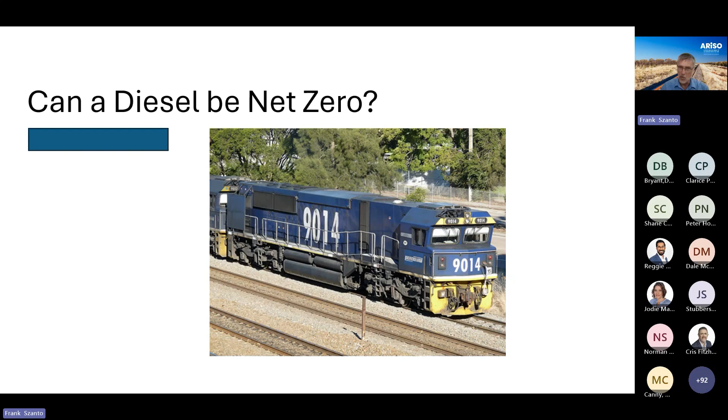Okay, thank you, and thank you to everyone for joining the webinar today. I must say, I did most of the preparation for this for AusRAIL last year, and that was before the world caught fire. At the moment, I wonder, does anybody care about emissions, or would they just like to get their hands on some diesel if they possibly can? But I think the talk is still relevant because we're looking at what are the alternatives to diesel fuel for diesel. So we'll go ahead, we'll keep going with the seminar.

Okay, so rail emits 4 million tonnes of CO2 a year, 1% of Australia's total, and transport as a whole in Australia is 22.6%. So you'd think with such a small proportion, rail will get a free pass. Well, unfortunately it doesn't. Under the safeguard mechanism, a lot of larger rail operators are classified as big polluters and are caught up in the safeguard mechanism, which requires that you reduce your emissions by 4.9% per year until 2030, or otherwise you have to buy carbon credits. And at the moment there is no easy way to achieve this.

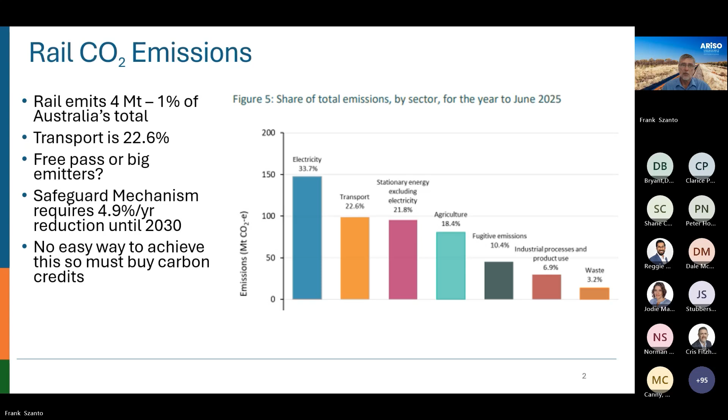Okay, so our major cities have electrified suburban networks, and hopefully electricity is being slowly converted to renewables. But outside the big cities, rail is powered by diesel. And just in case you forgot, diesel is all imported - we don't make it in Australia.

So there's an existing fleet of about 2,200 diesel locomotives out there, and also 250 DMUs - that's diesel multiple units, individual carriages. So that's nearly 2,500 vehicles altogether. So what time period would it take to replace them, when you think that if we've got to have them off by 2050, and like most diesel locos just go forever - there's a lot of diesel locos out there which were built when I was in primary school.

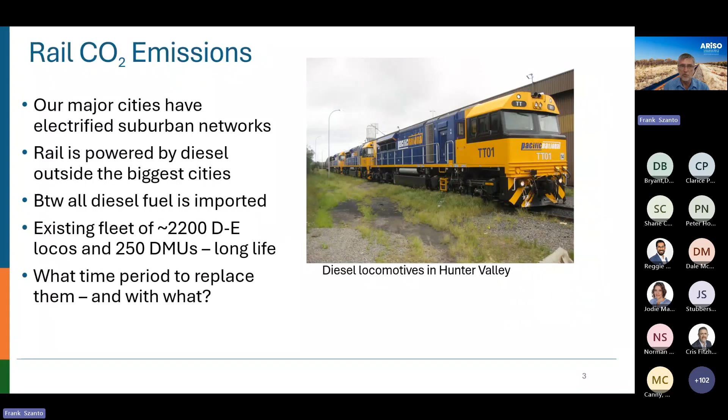One thing you could do would be to electrify all of our rail networks. We've got about 41,000 kilometres of track, of which at the moment about 3,400 kilometres is electrified. Just taking $5 million a kilometre, that would be $200 billion to electrify it all, which is a lot of money. So general talk is of using batteries and hydrogen as cheaper ways to electrify.

As of today, the range of battery trains is typically less than 200 kilometres, so it's not a universal solution.

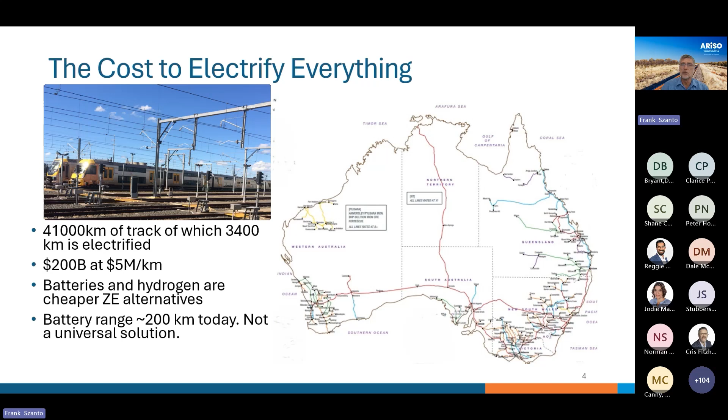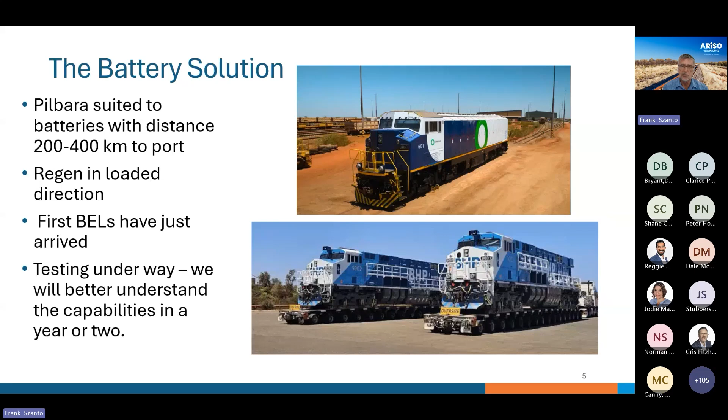Batteries are finally starting to be installed in locos in the Pilbara. Both BHP and Fortescue have taken deliveries of a few prototype BEL battery electric locos just in the last 6 months, and they're going to be commissioning them for quite a while. The advantages in the Pilbara are that the distances are about right, 200 to 400 kilometres to port, and the loaded direction is mainly downhill. The mines are up in the hills, so you're going downhill to port and you're in regen braking most of the way, which is advantageous for batteries. So they've got testing underway, but it's still going to be a long time before we see much movement in the composition of their fleets as they start to move to batteries.

Outside the Pilbara, there's really not much happening in Australia at all. Horizon's converting one narrow gauge loco. That picture on the right is a battery pack used on the 3000 class rail cars in Adelaide, which have been turned into hybrids, mainly so they can just not use engines when they're idling in the station.

But it would be expensive to convert all our fleet at the moment to batteries. If it was $5 million a pop, this is a figure from the air, 2,500 units, you're looking at $12.5 billion. And you'd have to convert 100 a year until 2050 to replace the whole fleet, that's a lot. And at the moment, batteries still can't go the longer distances.

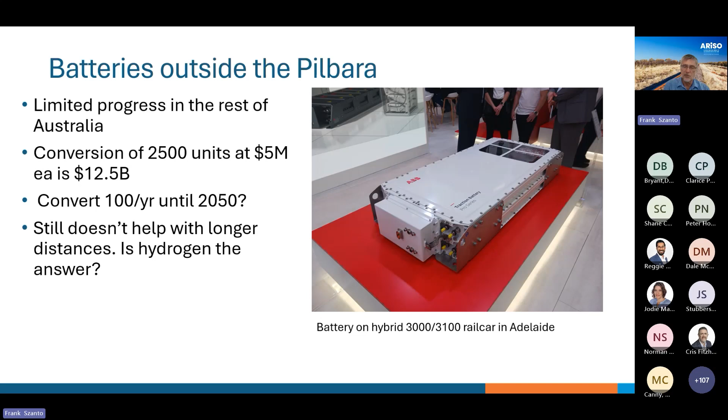So the question is, is hydrogen the answer? What I've got in the picture there is the refueling station for a fleet of hydrogen trains running in Germany. This fleet was introduced in 2019. There are 2 car sets with fuel cells replacing these multiple units. But you can see that the infrastructure just to fill the trains is pretty significant. You've got all those high pressure reservoirs there, which store hydrogen at 50 megapascals. The hydrogen comes by truck on the road from a chemical plant 35 kilometres away.

Transporting and storing hydrogen is very expensive. And at the moment, the hydrogen is actually made from natural gas or methane. When you make it from renewables, it's even more expensive. And the cycle efficiency - you're making the hydrogen by electrolysis of water, then you're transporting it, storing it, then it goes into fuel cells - you've got a loss of efficiency there. You end up, it's about 25% efficiency over the cycle, so much less than for batteries.

And there's really been no progress since 2019. There was a certain amount of optimism back then, but really nothing has happened with hydrogen since.

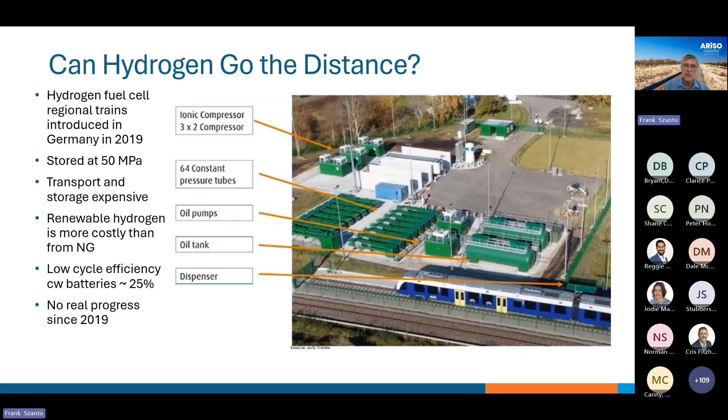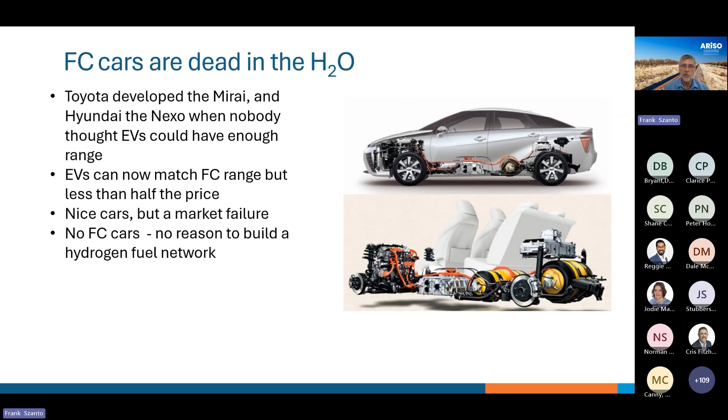And in fact, the idea of hydrogen-powered fuel cell cars, they're dead in the water. Toyota developed the Mirai and Hyundai the Nexo, and that development started more than a decade ago because at the time, nobody thought that battery electric cars could ever have the range that's needed to replace conventional petrol engine cars. But now, these are nice cars, but battery cars will do it for half the price or even less. And because there's been no development of hydrogen cars, nobody's built a network to refuel them. So there is no hydrogen fuel network. There's no hydrogen economy.

Some manufacturers are still persisting with fuel cell trucks because they think hydrogen is the answer for long distance trucks. If they succeeded, you'd have to build a network for refueling the trucks, covering all over the state or the states. But until that happens, there's no incentive to build a distribution network. And without that demand, no one's going to develop this hydrogen economy. I really think it's going nowhere.

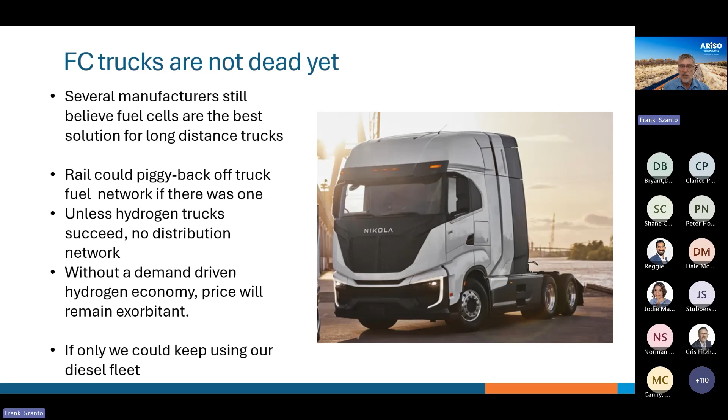So you ask the question, well, if only we could keep using our diesel fleet somehow. And what we really want is a drop-in zero-emission replacement fuel that wouldn't require modifying locomotives at all.

And the first thought, well, vegetable oils - you can burn vegetable oil in a diesel engine. And in fact, Rudolf Diesel, his early experiments, he was using peanut oil. One of his first diesels was exhibited in Paris in 1900, running on peanut oil. And vegetable oils are they are triglycerides.

When you burn vegetable oils in a diesel engine, it cokes up in no time, and that's not a good thing. So the answer to that is to make biodiesel, also known as fatty acid methyl esters, which you can make on a kitchen stove. It's quite simple.

You heat up vegetable oil with some methanol, moderate heat, and that produces a FAME, or fatty acid methyl ester molecule. The triglycerides are just three of them side by side, joined at the head with the three carbons joined together. When you boil it with methanol, the methanol replaces the three at the head, it goes away and produces glycerin.

That's a byproduct. And you get this molecule, which is exactly the same as diesel, as molecules in diesel, with 16 to 18 carbon atoms. But the difference is you'll see there's two oxygens on the right-hand side.

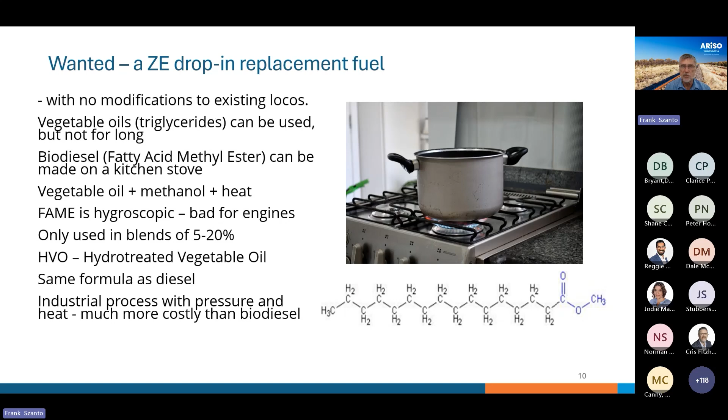So we have to find a feedstock. Now, in the EU, they've had some scandals with palm oil, where they like to have everything green in the EU, and they don't like rainforests being chopped down in Indonesia so you can grow palm trees and make palm oil. But the scandals were that palm oil was being imported to the EU labelled as mill waste, like the impure stuff from when you start up and stop your process. But it turned out they were sending large quantities of virgin palm oil, which was not what was supposed to happen.

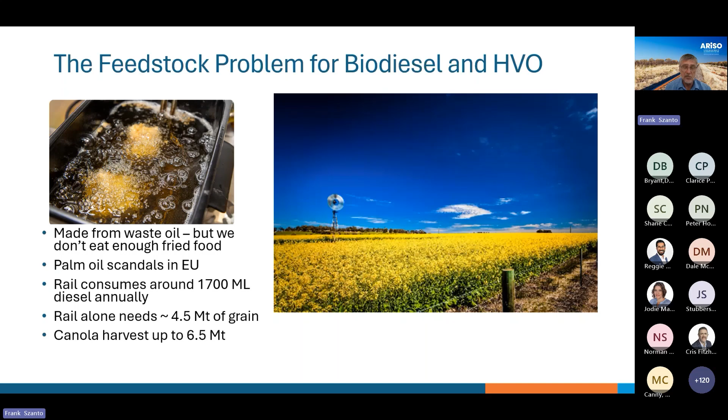So yeah, rail requires a lot of vegetable oil if we were going to go this way. Our annual consumption is about 1,700 million litres of diesel. So if you're going to replace that with oil, say from grain, you'd need 4.5 million tonnes of grain. And our whole canola harvest is about 6.5 million tonnes. And actually, apparently, most of that goes to Europe to make HVO.

So if it was just rail, you might get away with it, but road and aviation are going to be competing for the same oil, and between them, they're more than 20 times bigger than rail. And displacing food production to make fuel, it's just a dead end - it's just not going to happen. We'd have to double all our grain production just to make fuel.

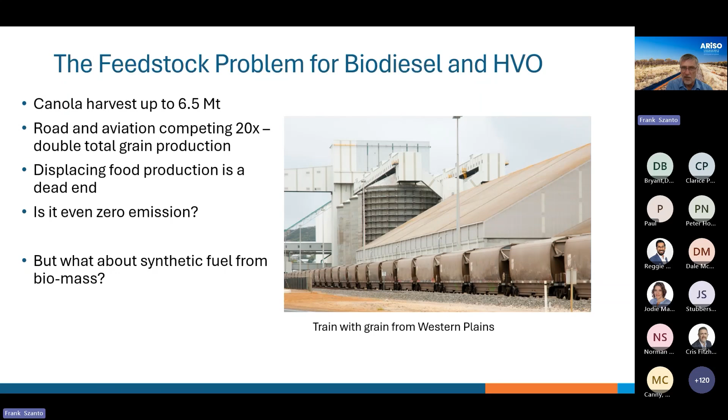So the other question is, is it even zero emission? Like to grow grain, you need fertilizer, and as we've just discovered recently, the ammonium-based products all come from the Middle East - they're made from natural gas. And also you need diesel for your farming machinery. So there's actually quite a bit of fossil fuel that goes into growing grain. So if those are ruled out, what about synthetic fuel made from biomass? By the way, that picture on the right is a grain train unloading at a grain hopper.

You can actually synthesize any hydrocarbon using the Fischer-Tropsch process, which was invented by German chemists back in the 1920s. It fueled the German war machine in the Second World War with synthetic fuels made from coal, and it was also used in South Africa during the apartheid era when they were being boycotted and couldn't get oil. It does contain exactly the same molecules as diesel fuel - what comes out is a range of hydrocarbons, but you get exactly the same molecules as diesel, so it's good in that way.

In the US at the moment, there are trials - it's called gas to liquid - where they're making diesel from natural gas rather than coal, which is obviously still fossil fuel. You could use biomass, or there's even talk of extracting CO2 from the atmosphere to make it, but that's a lot more expensive process.

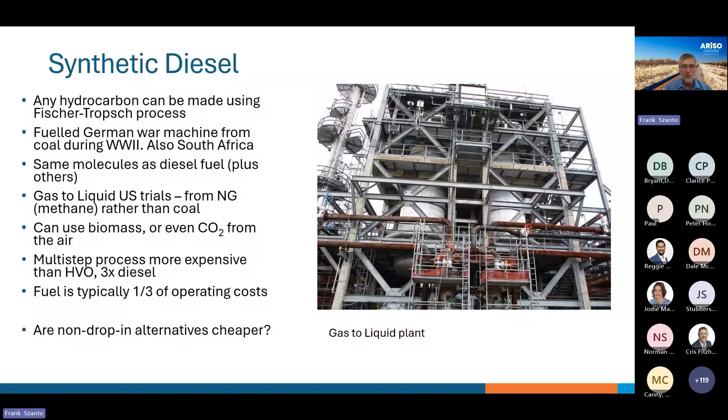Using natural gas is the cheapest way of doing it, but it still costs about 3 times the price of fossil diesel as it is now. For a lot of freight operators, fuel is about a third of their operating costs, so if you were to use a fuel which is 3 times the price, your business is pretty much in danger. So if the drop-in fuels are too expensive and not really viable, what about the non-drop-in alternatives?

This table here is not an exhaustive list, but shows most of the alternative fuels which are proposed. The things coloured red means that's not good. You can see on the left-hand column, most of them will not ignite in a diesel engine - they won't work in a compression ignition engine, except for DME at the bottom, which I'll talk about later. That means you can use a certain percentage, but you need a pilot fuel to ignite the mixture at the beginning of the combustion stroke. The other thing is most of them are gases - there's a few liquid, and except for natural gas, they all have a lower specific energy than diesel fuel, some quite a bit less.

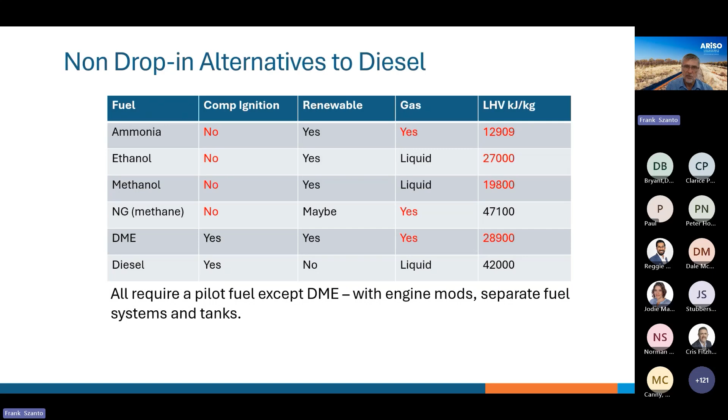So all of these will need engine modifications, separate fuel tanks and systems if you're going to use a pilot fuel.

The first one, ammonia, it's NH3. It's a true zero carbon fuel. Trouble is, at the moment, all ammonia - well, nearly all ammonia - is made from natural gas or from methane using the Haber-Bosch process. So you don't give off CO2 when you burn it, but you give off the same CO2 when you make it, so there's certainly no advantage in that way. But you could make the hydrogen by electrolysis and then go through Haber-Bosch, so yeah, it could be made renewably, although it's a lot more expensive that way.

At the moment, there's a lot of interest in ammonia in the shipping industry because they've got to look at replacing their oil-fired engines in the future, so a lot of engines are being developed to run on ammonia.

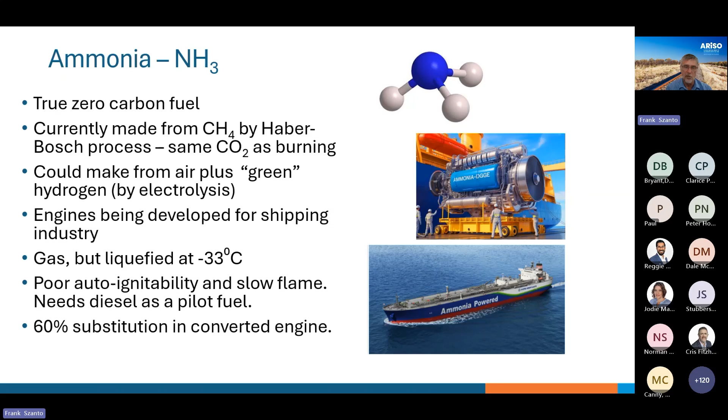Among the disadvantages, it's a gas - it can be liquefied at minus 33 degrees C. It's got very poor auto-ignitability and a slow flame speed, so it needs diesel as a pilot fuel. And in fact, if you convert a diesel engine, it needs quite a lot of diesel, so you might only be substituting 60% of your diesel in a converted engine. When you've got a combustion chamber that's specially made for ammonia, you can get by with a lot less pilot fuel, but for a conversion, you need quite a lot.

So you need a dual fuel system. One of the other problems is you need high compression to get the ammonia to fully burn, and that produces quite a lot of NOx, nitrogen oxides, so you need exhaust after treatment. If you have a lower compression ratio, so you don't produce as much NOx, then you get unburnt ammonia in the exhaust, and that's toxic. So your choice is being noxious or toxic, I suppose.

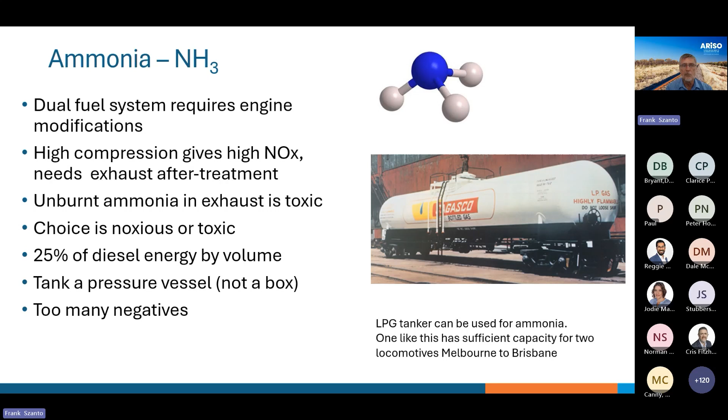It's also quite a low energy fuel - only about 25% of the energy by volume. So you're going to need, well, number one, you need to store it in pressure vessels rather than a box-like fuel tank - you're probably going to need a tanker like the one on the right. They've used that tank for LPG, but they've used them for carrying ammonia as well. But on the whole, ammonia's got a lot of negatives, and I don't think it's a viable alternative for the future.

There's LNG, methane. When fracking first started, there was a lot of interest in trying to get diesels to run on LNG, and both EMD and GE did quite a lot of development work and ran trials with several US major railroads running diesels converted to run on methane. The gas has got to be either compressed or liquefied to carry it around. In spite of the trials, there was only one railway which adopted it in the end.

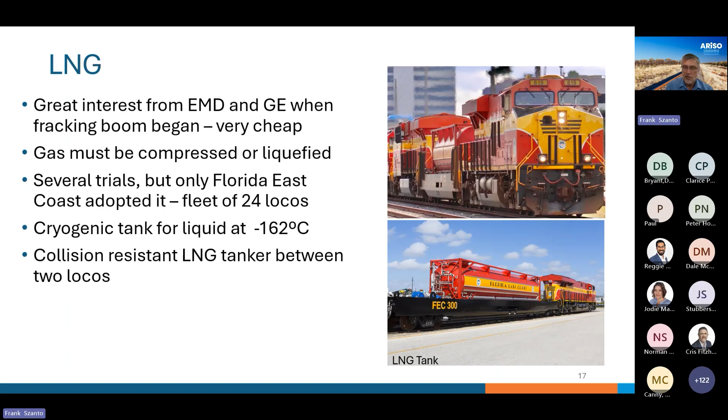That was Florida East Coast. They've got a fleet of 24 locos running up and down the coast of Florida. The LNG, liquefied natural gas, is carried in a cryogenic tank on a wagon, which is specially collision resistant because they're worried about being hit on level crossings. It sits between two locos, providing fuel to each.

So you've got to have a lot of pipe work because you've got to regasify the methane. They use radiator water from the diesels, piped back to this wagon in the middle, and then there's heat exchangers that gasify it and pipe it back to the locos. So it's not a zero emission fuel. It does reduce CO2, but only by about 28%. The substitution is running about 80% LNG and 20% diesel.

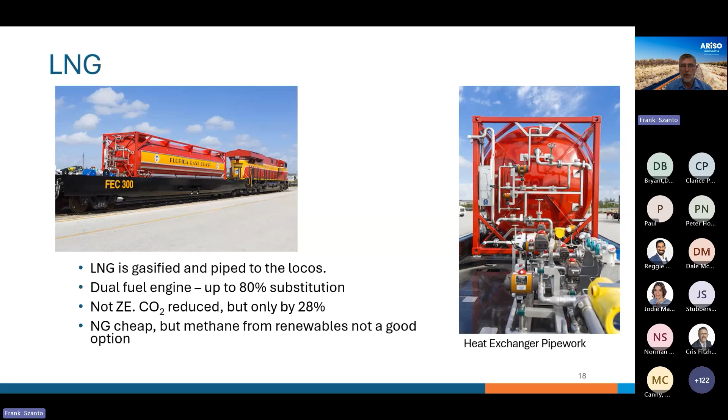In the US anyway, natural gas is cheap, but if you make methane from renewables, it's not so cheap.

So that brings me to dimethyl ether, which you may or may not have heard of before. It is made from, well, the usual way is from methanol. You basically stick two methanol molecules together. You can see the one at the top. The methanol is kind of like the three-legged dog. You stick two together and you get the shape down at the bottom.

It's got the same atoms in it as ethanol, except there's an oxygen in the middle between the two carbons. That has the effect of giving it a high cetane number, even higher than diesel, so it will work in a compression ignition engine, unlike methanol or ethanol.

It has relatively low NOx, and also very low, or hardly any soot at all, because of this oxygen between the carbons - it just doesn't produce soot. It was originally investigated as a replacement fuel for urban buses because it means no particulates in cities, which was seen as desirable. That was in the days before greenhouse gases became the overriding issue.

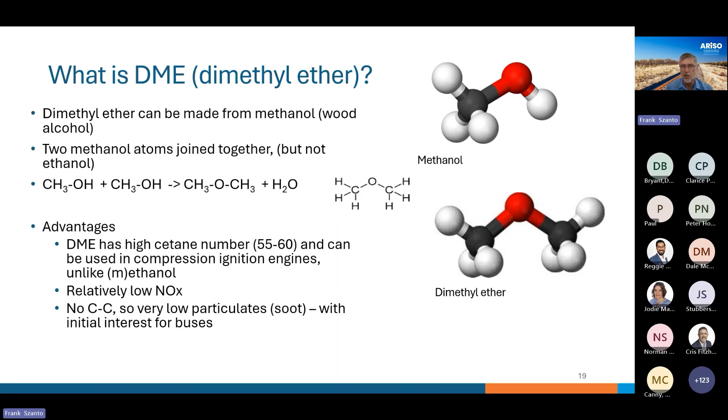But there is bad news, and it's a gas. Its boiling point is minus 25 C. It's very similar to LPG or propane, which you might be familiar with from barbecues and things like that - you get it in cylinders down at Bunnings. When it's compressed, like at 500 kPa, which is brake pipe pressure on a train, so not really high pressure, it'll still remain liquid.

At 20C, so I compare it to like it's a barbecue fuel compared to liquid hydrogen, which is rocket fuel and requires very high-tech handling.

It's got some other disadvantages. It's got very low viscosity, so it does wear out pumps unless you add a lubricant, and it does need new injectors because you need a higher volume of it than diesel, and it is lower energy density than diesel. So you do need to stock more of it.

The fuel tanks need to be cylinders, not a box. I've got a picture of a loco there with a 10,000 litre fuel tank. In that space, if you pack cylinders together, you can only fit about 4,650 litres equivalent energy of diesel in the space of 10,000. So for longer journeys, you're going to have to tow a tanker.

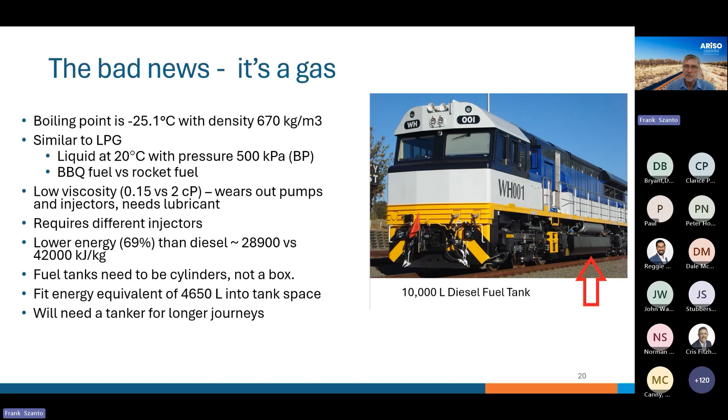As for making methanol from biomass, if you heat up wood without letting it catch fire, so in an oxygen depleted environment, you get what's called syngas, a mixture of carbon monoxide, hydrogen, some CO2, and a little bit of methane. To make methanol, you need a 2-to-1 ratio of hydrogen to carbon monoxide. So what they do is use the water shift reaction, where you inject high pressure, high temperature steam into the syngas, which converts carbon monoxide, stripping off the hydrogens from the water, to get CO2 and hydrogen in the right ratio, and then you can make methanol.

So you could make the hydrogen by electrolysis using renewable energy, and that's the future path. That means you produce a lot less CO2 when making your methanol. Then to make your DME, you join your two methanol molecules - it just requires a bit of pressure and temperature to join them.

We would need the DME equivalent of 1,700 million litres of fuel, which we need per year. You need about 10 million tonnes of biomass. And that's not an out of the world quantity. We export about 12.3 million tonnes of wood chips, or we did in 2022, and the waste from cane is about 5 million tonnes. So that amount of biomass is not unreasonable.

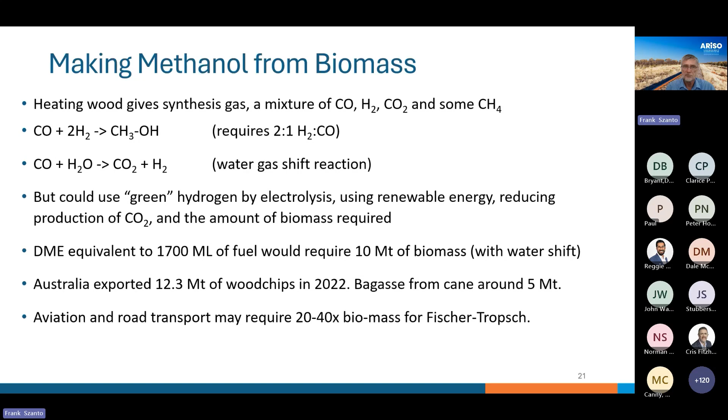But then the question is, is it really net zero? Because obviously you're releasing CO2 both when you make DME and then when you burn it. So doesn't that count? Well, just for perspective, in the really bad bushfires we had back in 2019-2020, 830 million tonnes of CO2 was released just in that one summer. But that doesn't count on your scoreboard, because CO2 from wood, which regrows, doesn't go on the official figures. So our official CO2 for that year was only 528 million tonnes.

Here we go again. So you could take the point of view that why not harvest our native forests - please don't tell anybody - and save burning all those marsupials because the bush is going to go up anyway. So why not just take the wood out first? But yeah, I won't mention that. That's not a good path to go down.

But methanol is traditionally made from wood, but any biomass can be used.

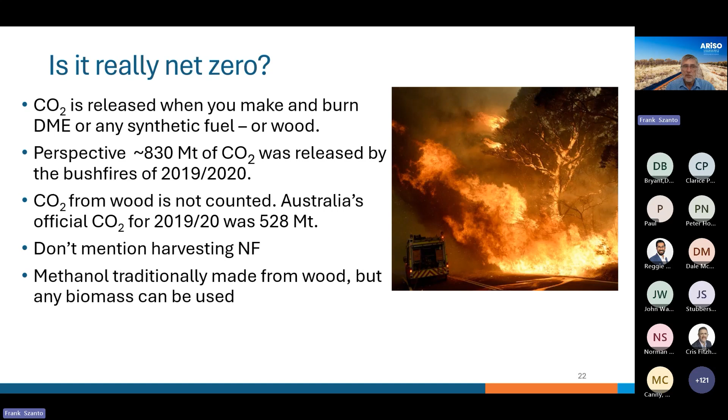The other thing is you can actually use methanol as a fuel without even making it into DME. But you do need a pilot fuel. In fact, the other alternative to ammonia for ship engines is methanol. There's a lot of engines being developed requiring a pilot fuel. But you can use methanol as the bulk fuel - it's relatively cheap - and use your more expensive fuel, your HVO or synthetic diesel or DME, as your pilot fuel, which is only needed in small quantities.

And being a liquid, methanol is much easier to store and transport. You don't need a pressure vessel. It does have less energy than DME, but what you lose on the roundabouts, you win on the swings, because you don't need to store it in a pressure vessel.

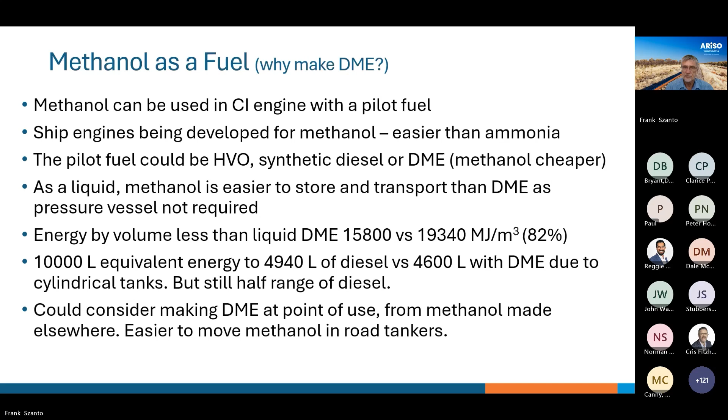So if you're going to take this path, you need to build a methanol/DME ecosystem. I'm imagining that maybe half of rail is going to go to batteries in the longer term, so maybe you only need to make enough methanol and DME for half the existing loco fleet. So you need about 1.3 million tonnes a year of methanol.

At the moment, Australia makes no methanol. We had a methanol plant in Laverton, Victoria, closed in 2016 because natural gas was getting too expensive. But there is a company, ABEL Energy, who are looking to make green methanol in Tasmania at Bell Bay, using forest waste and electrolysis for hydrogen. That's proposed for 2029, and this is to sell for shipping - methanol's quite a big thing in shipping.

And you would need 4 such plants to supply the whole rail industry - so kind of one in most of the states. And you need about 5 million tonnes a year of biomass to make that much DME. That equates to 15,000 tonnes a day, or about 4 train loads.

The little train on the right used to run to Albany, Western Australia, narrow gauge, so it was a pretty small one. But a mainline train, you'd easily carry nearly 4,000 tonnes to each plant.

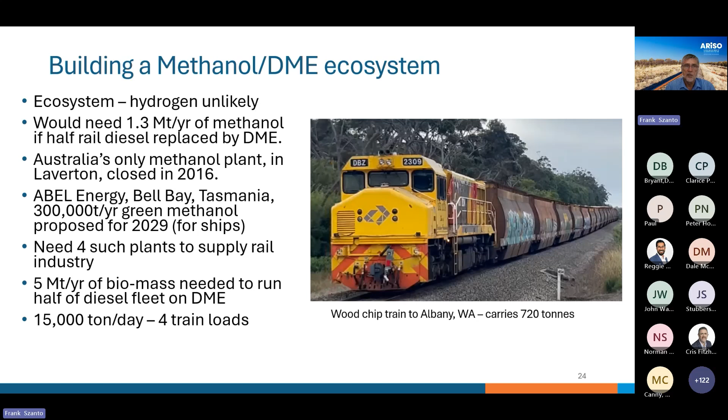So in conclusion, a diesel can be net zero. It's going to cost a bit more, and the pros for DME or methanol are that it is net zero if made from biomass. It could be used on existing locomotives with a few modifications to injectors, pumps, and a different tank. It's much easier to store and handle than liquid or compressed hydrogen. It's not cheap, but it is cheaper than hydrogen or synthetic diesel. So is it a viable path for the Australian industry?

Rail demand would be sufficient to get this going as an industry, whereas with hydrogen, you really would need other industries to push it, to create that critical mass to get it going.

Your ecosystem would require methanol production, sources of biomass, and rail links to production facilities.

If somebody decided we really will go this way, then you could have it up and running by the early 2030s, and maybe it would carry us through to the mid 2040s, when by that time battery technology, and there might be other technologies, might be a lot better, and you could truly electrify all rail systems. So this is a kind of a concrete plan you could present to government.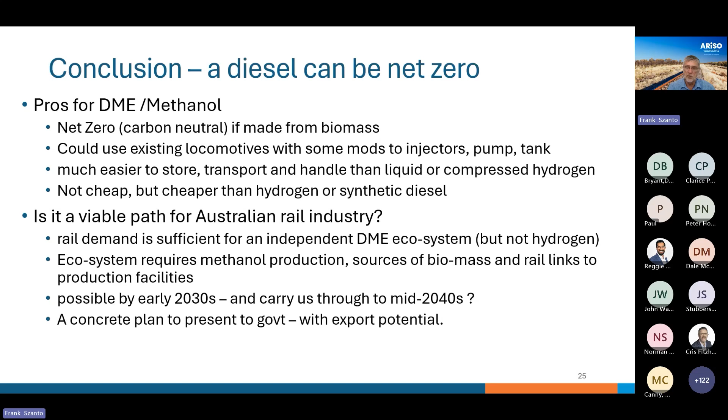So my conclusion is, don't send your diesel to the scrapyard just yet. And that's the end of the talk. Thank you.

Great, thank you very much, Frank. A very interesting thought around what's going on. It was a good point, obviously, early, that diesel supplies are maybe not quite as rock solid as we once thought they were. So what sort of alternatives are there floating around?

We've got a few questions from a couple of different sources, so we'll run through a few of them. One was around methanol: how much additional water supply for wood production if Australian locomotives move to this option? Wood production from softwood plantations, are they heavy in water usage? Is that potentially an issue?

I have no idea. I always assumed that forests just grew from rain, but I don't know that. No, that's fair enough, mate.

And the other question is talking about green hydrogen from electrolysis. Is that achievable, you think, by using solar panels, wind turbines, that sort of thing? Or are we still looking at using the grid as it is?

Well, it could be both. The whole idea is that you're using renewable energy. For example, Fortescue over in Western Australia has been looking a lot at hydrogen, and they've been putting in solar farms and wind turbines to create the electricity to make the renewable hydrogen.